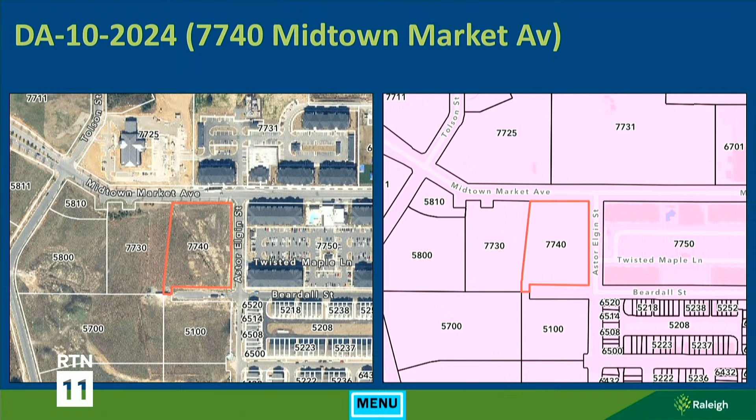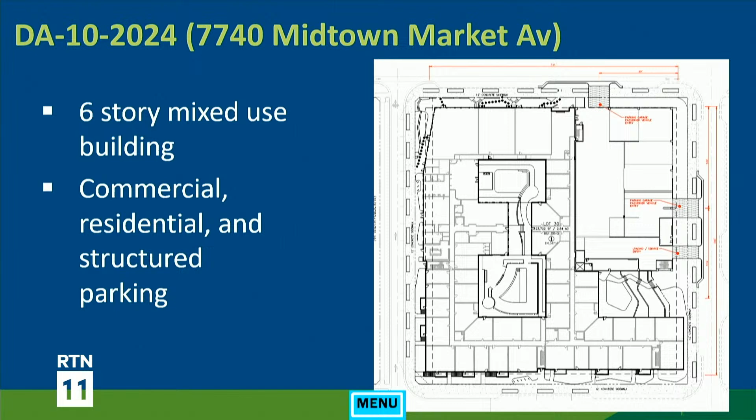Astor Elgin Street, with address 7740 Midtown Market Avenue, and it is zoned planned development. The applicant is proposing to construct a 6-story mixed-use building across the site, comprising a mix of residential and commercial uses and structured parking. They have requested 2 design alternates. The first is for relief from the requirement for vehicles to enter and exit parking areas in a forward motion, for a proposed driveway located on Astor Elgin Street. The second design alternate is to reduce the minimum spacing from 150 feet to 99 feet between the proposed driveway on Midtown Market Avenue and the intersection of Midtown Market Avenue and Astor Elgin Street.

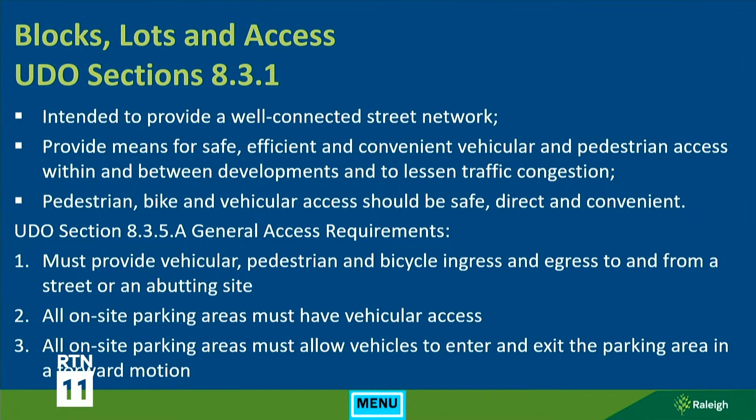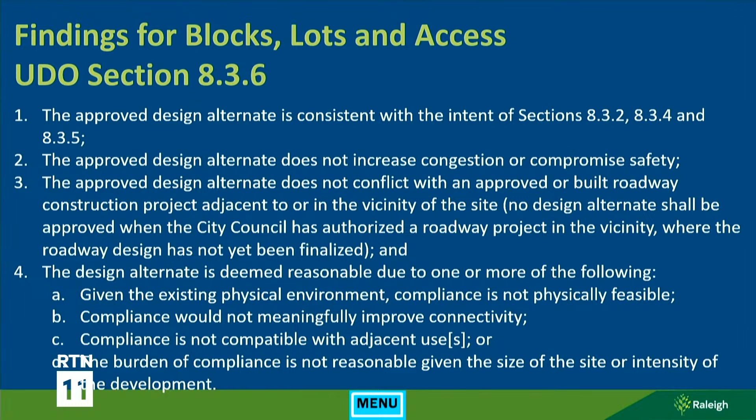The city's blocks, lots, and access regulations are intended to provide a well-connected street network, safe, efficient, and convenient access within and between developments, and to lessen traffic congestion. There are 4 findings that need to be met to grant a design alternate to these access requirements for the first design alternate request, and for the second one, there are 6 findings to be met to grant the design alternate from the Raleigh Street Design Manual.

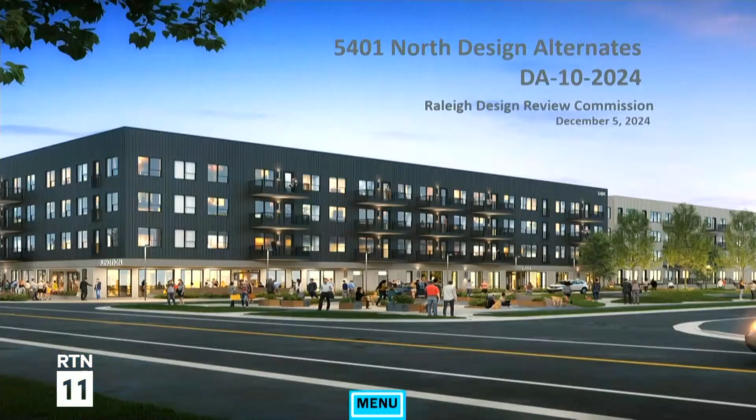That's all that I had. With that, I'll invite our transportation staff member up in case they have any comments they'd like to share with you all before the applicant comes up.

Good afternoon, I'm Tyler O'Farrell with City of Raleigh Transportation. Do you swear or affirm that the testimony you'll provide will be the truth, the whole truth, and nothing but the truth? I do. Thank you.

City of Raleigh Transportation doesn't really have anything to add to what Casey presented, so if there are any questions, additional feedback, I'm here for that.

Okay, any commissioner questions at this point? Saying none, if the applicant would come forward to present the case.

Good afternoon. I'm Collier Marsh with Parker Poe at 301 Fayetteville Street, here on behalf of the applicant. I do have a presentation if we could bring that up. I'd like to start by asking that our application, the case report, presentation, and all the supporting materials be admitted into the record. So admitted, thank you.

I'd also like to start by having our witness sworn in. If you would state your name, relation to the case, and address, please. David Boyette. I'm with McAdams, a civil engineer, 621 Hillsborough Street, and I'm the project manager and civil engineer for the project. Do you swear or affirm that the testimony you provide will be the truth, the whole truth, and nothing but the truth? I do. Thank you.

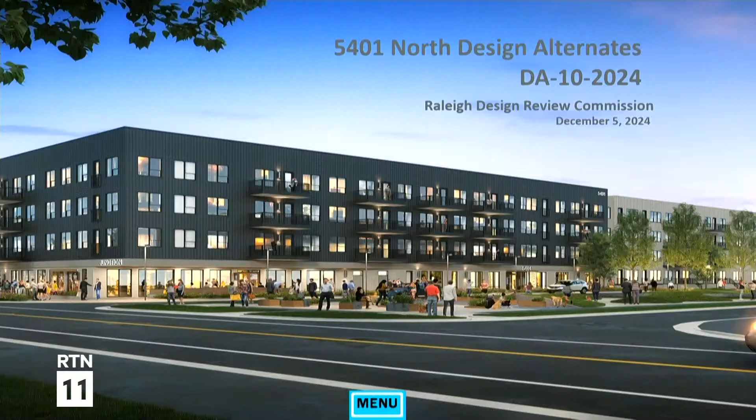So this is a request for two design alternates. This is a vertical mixed-use project within the 5401 North planned development. Just want to pause on this intro slide to put this project in perspective. These design alternates relate to site access and access to the parking garage, but really, the motivation behind these design alternates is to be able to have a successful vertical mixed-use building.

This is a perspective coming in on Midtown Market Avenue, the main entrance into 5401 North. The perspective is northwest of the site, looking at our northwest corner. You see ground story retail and then residential units above it. Across that street in front of our building, there's a little parklet and an active pedestrian space. Although not the subject of the specific request, this is the motivation behind it: to come up with a project that can have a successful vertical mixed-use component in an area where you wouldn't see a lot of vertical mixed use. We think it has an exciting outcome, but we're going to get bogged down in some site access details to get there.

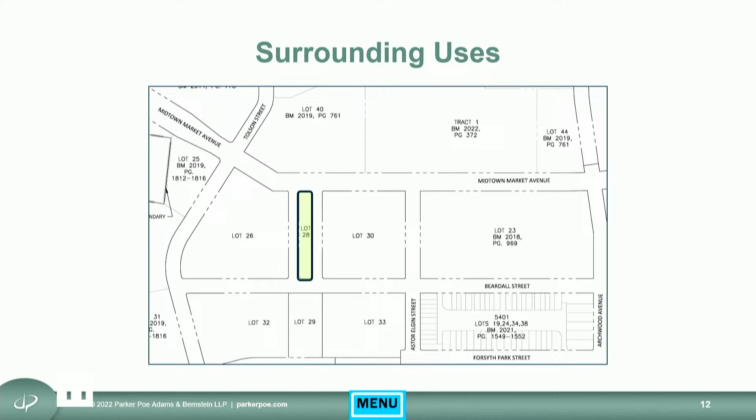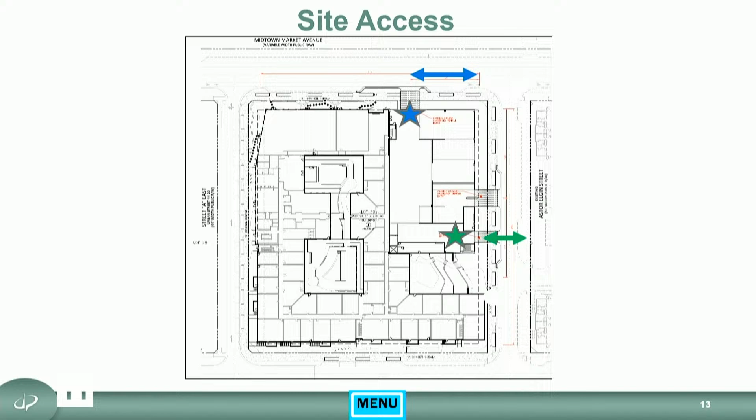They're driven mainly by the goal to have a successful vertical mixed use and retail section on that northwest corner and the western side, as well as some site constraints, small lot size, and topography that we'll go into. This slide just quantifies the requests.

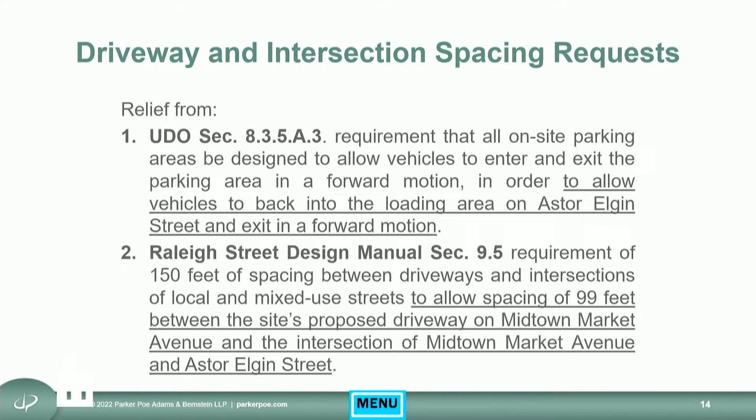Back in, pull out forward is the first one for section 8.3.5. Normally it would be forward in and forward out. And then for section 9.5, we're asking for 99 feet of spacing in lieu of the typical 150 feet spacing.

So we'll start with David Boyette. David, could you please state your name? You already covered your address. Can you just give your background, your education, your experience?

Sure, absolutely. David Boyette with McAdams, licensed civil engineer in the state of North Carolina. Went to NC State, have a civil engineering degree from them. Been practicing here in Raleigh for a little more than 20 years. A lot of commercial site development, a lot of mixed use, so very familiar with how these types of projects unfold. At this time, I'd like to tender David Boyette as an expert in civil engineering and site design.

So David, can you explain to the commission your role in this project? Sure. I am the project manager for McAdams. I'm leading the civil design effort.

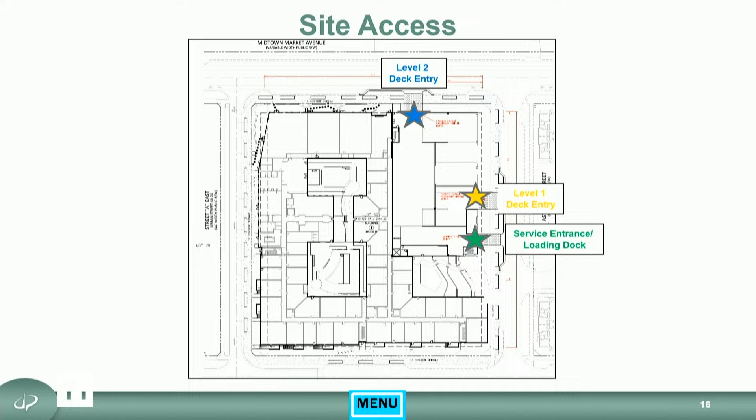Sure. So again, you enter where the yellow star is on the lowest level, as a vehicular entrance, with green obviously being service. As you enter, this is basically the lowest point of the site, very close to where that vehicular entrance is. So the vehicles come in and immediately turn to the right to start ramping up to the second level. There are a few parking spaces on that lower level, but most of it is going up to the second.

If you are a service vehicle, you're going to back into this loading dock area, which we'll get to in a second, but that's a double height space. That's what allows the vehicles to navigate in through that area. As soon as you get past this line right here, you no longer have the head height, and that's due to the ramping needed to make the parking garage function. So that's the delineation line there.

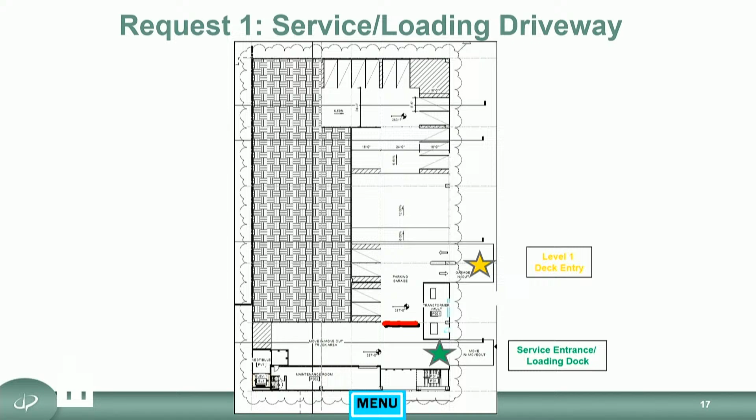Absolutely. The highest point of the site is on this corner of Midtown Market where our retail space is. There's about 16 feet of grade change from that high point on the site to where the low point is located on Astor Elgin. That's how our parking garage entry level 2, and the others on level 1, work because of that topo change. There's about 4 feet of grade change from the Astor Elgin Midtown Market intersection, which slips down about 4 feet. Then along Midtown Market, going from the northwest corner where the retail is to the Astor Elgin intersection, there's about 14 feet of grade change there.

So we're looking at these side elevations. Can you reiterate why, when we look at our loading area entrance, we couldn't have that same two-story loading area continue into other parts of the deck? Sure, that has to do with the grade inside the parking garage and why we have to have the ramp that gets us up. It's really the ramp on the second level coming down that takes that head height down to a floor of 11.5 feet. Then you've got the structure of the parking garage, so you don't have the head height for a truck to maneuver in that area.

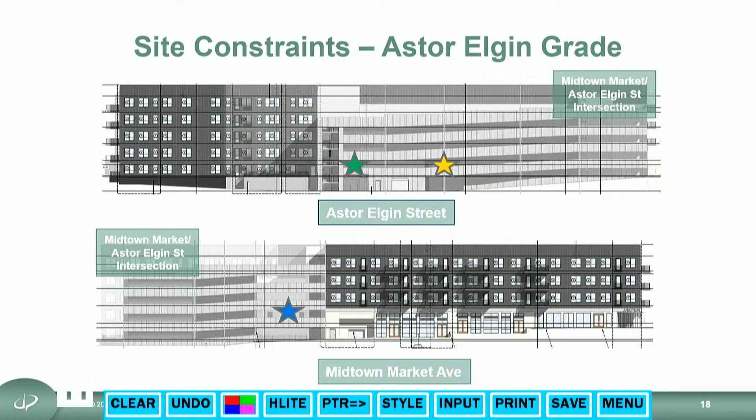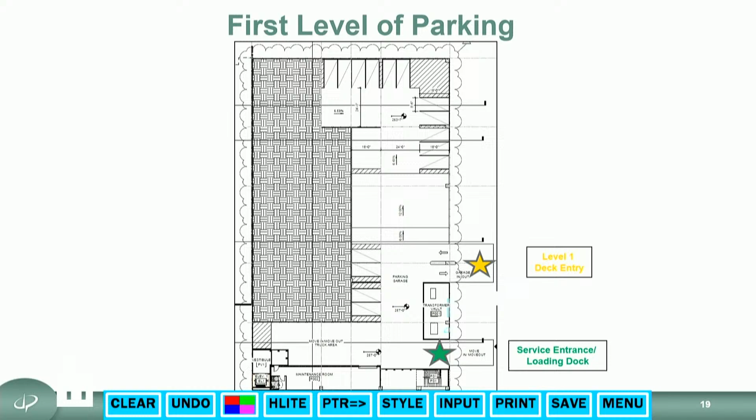And just to reiterate for the commission, we said this at the beginning, but again, why did we choose to put the loading entrance in this location? Because it's the furthest away from any pedestrian activity, or where we see pedestrian activity is going to happen. So we're trying to mitigate those interactions.

So I'll ask the commission to remember the list of all the things we got to check. I'm going to ask a couple of those more conclusory questions. So, David, does this proposed loading orientation increase congestion or compromise safety? No, in our opinion, it does not.

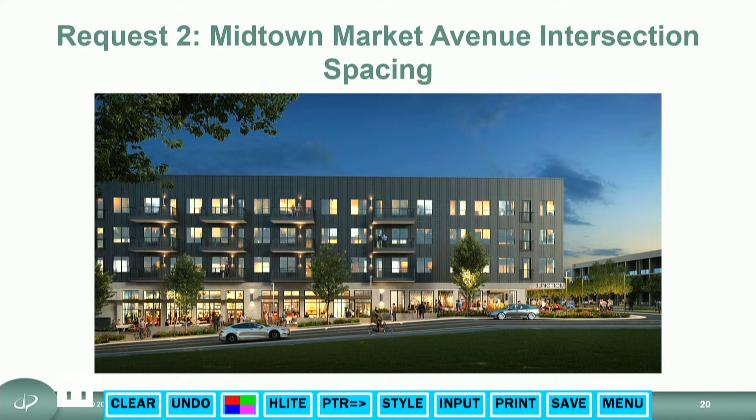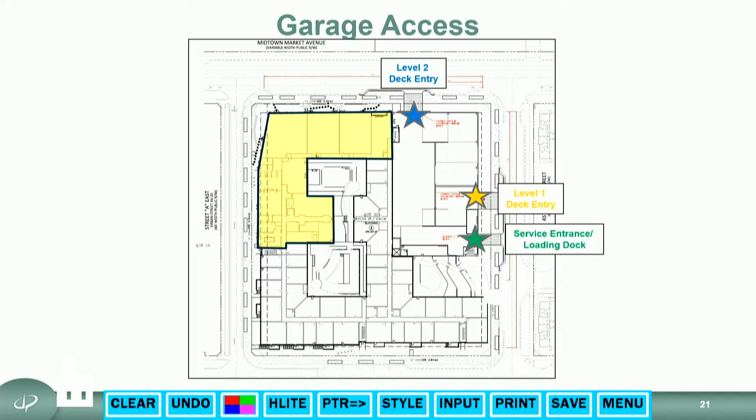Okay, and why didn't we locate the entrance any further west on Midtown Market? Sure, that too is a grade issue. We had to match up the elevation of the site to the upper level of the parking garage. Also, sliding any further would have reduced the experience of that retail zone. It's probably hard for the commission to see, but is it correct that whole frontage is 311 feet? Yes, 311 feet is correct. So in any case, either side of that midpoint puts you out of compliance, is that right? That is correct.

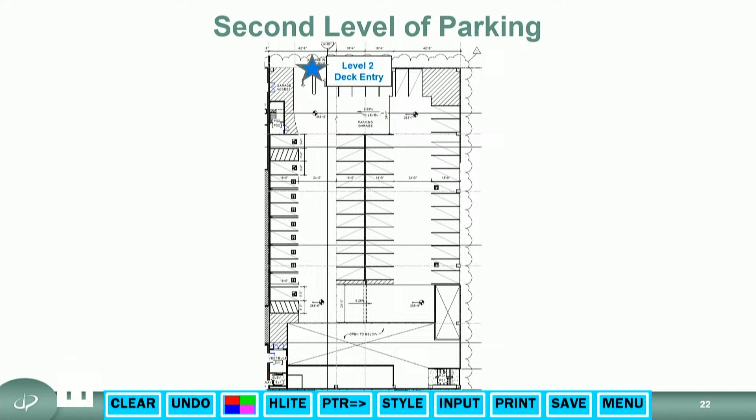So moving to the second level of parking, this is the entrance location for Midtown Market Avenue. Can you explain this level's features and how it functions? Sure. You enter here on the second level of the garage, and then circulate around this direction to go up to the third level. This is the area that's open to below that we discussed previously.

Perfect, so going through our formal criteria here: does this proposed Midtown Market access increase traffic congestion? No, it does not. We had trip generation numbers run for peak AM and PM hours, submitted to the city, and in our opinion that shows this does not increase congestion. Does this access point compromise safety? No, we do not believe it compromises safety. It's intended in its location to reduce pedestrian and vehicular interactions.

Thank you, David. I'll quickly summarize the application of those conditions based on the evidence you just heard, and we're available to answer any questions. Starting on the left-hand side, it says driveway spacing, but that's the loading request to have a backwards motion into the loading area and a forward motion out. It's consistent with the intent of Section 8.3.5 requirements, which is to have safe and efficient vehicular access to a site.

This is certainly efficient and takes into account the unique site constraints that we have here. With our offered conditions, our expert has testified that it is a safe layout for the project. He stated in pretty precise terms that it will not increase congestion or compromise safety, nor does it conflict with an approved or built plan.

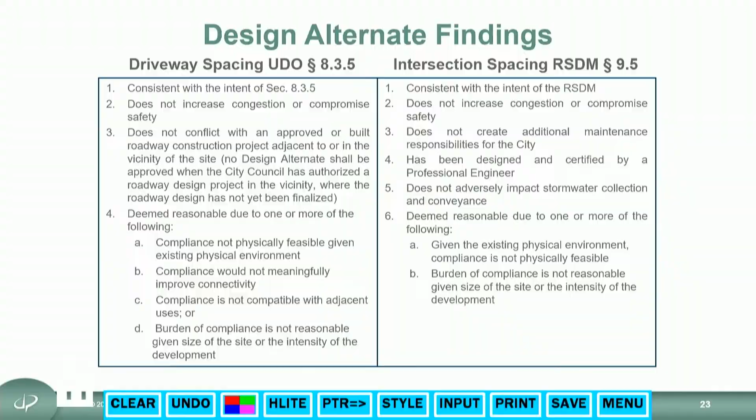And again, getting to the reasonable standard, the big picture discussion, our physical environment tells us a lot about this site. Again, small frontages, 311 feet of frontage. If you're moving a foot on either side, there's some form of a request. In this case, the location we chose is appropriate for the overall picture of the project. So I think that checks both the physical environment and the slopes, and also the standard of not reasonable given the size or intensity of the development. It's a 2.3 acre site with a lot of good things going on.

So with that, we have presented competent material and substantial evidence as to each of these elements, but we've got our team here available to answer any questions you may have.

Okay, thank you. Are there any members of the public who are here to speak on this case? I'm seeing none. Any questions from the commission for the applicant?

What's the planned programming for the site immediately to the east and to the west? So to the east, the property is already developed with multifamily. The program for the property to the west has not been fully developed yet. There could be a phase 2 of this project that would be more multifamily or with mixed-use elements also, but that's not really been fleshed out yet.

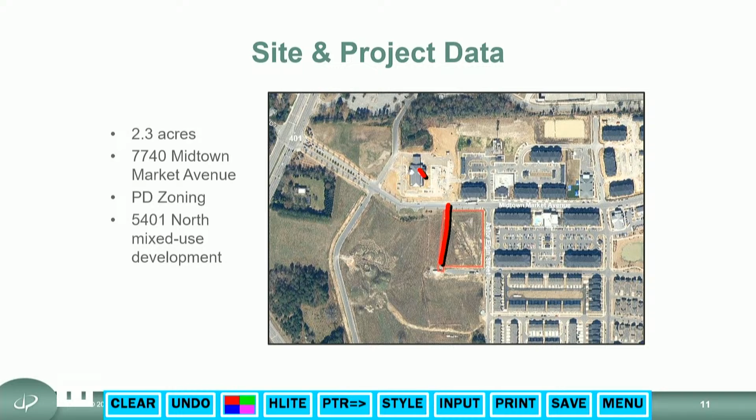Yeah, I'm just a little bit curious about your assertion that there's less pedestrian traffic on Astor Elgin, because there does seem to be a lot of residences on that side. Can you elaborate a little bit more on how you got there? Sure. The main entrance to our building will be on what we're calling Street A right now, which is the north-south street that we'll be putting in. So while there may be folks on the opposite side of Astor Elgin, we don't see the people from any of these townhomes or that multifamily crossing over the street and then coming north. They're most likely going to stay on their side of the street. Obviously it's possible, but not as likely.

What's the intersection configuration, so is Midtown Market free-flowing and then there's stop signs from Astor? Correct, Midtown Market is the free movement, and then all of the other cross streets have stops.

Thank you for putting in writing your suggested conditions. It's much appreciated, and it does seem pretty consistent with what we've done in the past. Any reason why you would do this just at the one entrance and not at all of the vehicular entrances?

Well, I don't know that there's a reason why we could not do that. We typically don't do them at entrances where we are complying with the code of forward movement in both directions. And on the landscape boxes sticking out, I think the general preference would be to have the wider streetscape, but in this situation there's an incentive to funnel people a little more than would otherwise be necessary.

Gotcha. Understood. I think in interpreting the plans, there's a landscape area buffering the parking deck - there's a northeast landscape corner area on the property that separates the sidewalk from the parking garage. So at this point in time, there is no sidewalk in that location, but should that design change, we want to make sure that we're still having a safe environment there.